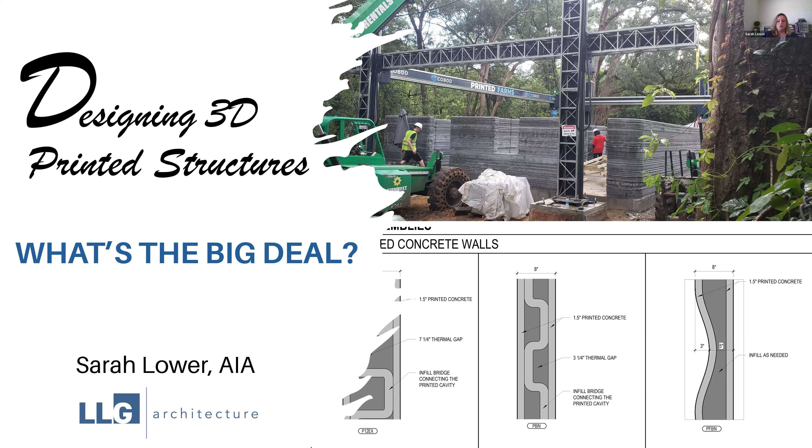So today we're talking about 3D printed structures and what's the big deal. You know, architects aren't responsible for means and methods on the construction, so why should we care? But we do care because we are responsible for the health, safety, and welfare of those that are within the structures that we design. So really quickly, I'm going to talk about our learning objectives, which are brought to you by my daughter.

The participants will be able to identify each type of printer currently available, materials used, and the best application for each printer. Participants will also be able to identify the pros and cons of using 3D printing in construction. You will also be able to identify key design elements that need to be considered from other construction methods. And participants will also be able to apply current IBC requirements and coordinate with engineers to meet current code requirements, for which there is no standard at this time.

So just to kind of outline for you guys what we're going to talk about today, I'm going to do a quick introduction. There is so much to cover, but I'm going to try to do it in 15 minutes or less. We're going to talk about the design process briefly, and then I'm going to go into the case studies of the projects that I have been a part of to date.

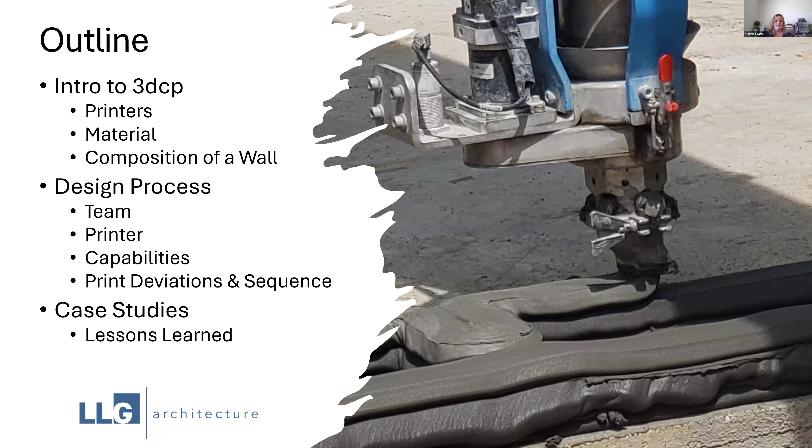So automation in construction has actually been around for the last 50 years, and people don't know it because it's not really taken off. But it has taken off in the last decade, where robots as prefabrication and factory-based robots have really been taking the forefront in the news and what people are trying to do these days.

There are over 300 companies worldwide that are involved in some sort of automation in construction, whether they are actually implementing the machines or manufacturing the machines. Automation is something that people are looking at these days for several different reasons. There's less injury, quicker completion times. The robots don't get fatigue, they don't get sick. There's enhanced productivity and increased consistency because robots are all about precision.

Automation is currently in the United States. They are doing rebar laying and tying, brick laying, marking layouts on slabs. So thank goodness chalk lines are fading out, hopefully. Printing three-dimensional walls, which we're going to be talking about today. And then, of course, there's the security bots that are keeping unwanted visitors off the job site.

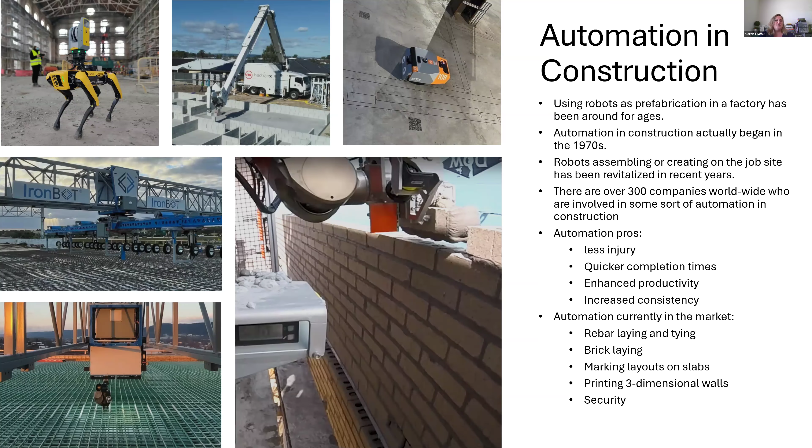So let's talk about 3D printers. There have been over 100 companies worldwide that are focusing specifically on creating 3D printers for construction. Most of them boast that they can print from 2 to 4 floors high, but only a handful have actually created proof of concept. I know Germany, Saudi Arabia, Dubai, and Canada, just off the top of my head, that have 2 or more stories.

You've got 2 basic types of printers, and everybody who's creating a printer is a variation of these 2 things, either a gantry or a robotic arm. Now, the gantry style printer is the printer that you would normally recognize as a desktop printer, something that we've come to see in most offices and what people who buy printers as a hobby use. And so basically they've just taken that concept of the desktop printer and supersized it. And you could see that.

So then the second part is the robotic arm printer, and that's where you have them either on crawlers or tracks, and the pump is feeding the robotic arm, and the robotic arm is then creating the formwork or printing the material, if you will. So the big players in gantry printers these days: Icon, which is in Texas, Black Buffalo, which is up in New York, and then Cobod, which is out of Europe. But they definitely have a presence here in the United States. The robotic arm printers, you have Apis Cor, Cybe, Vertico, 3D Potter, Mudbots. There are lots of the robotic arm ones.

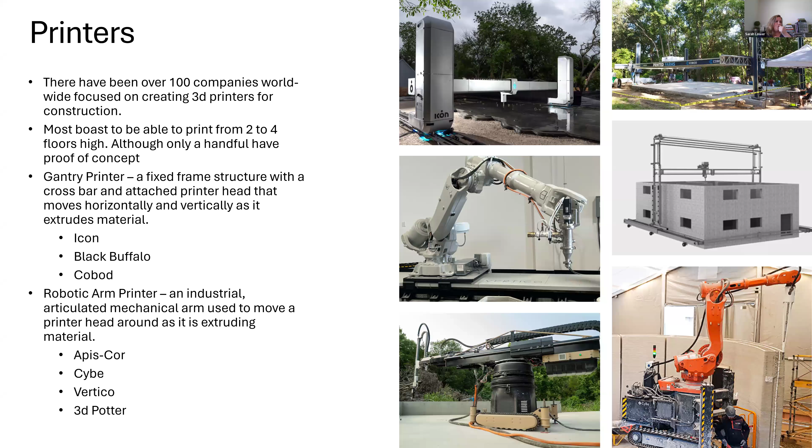Specifically in Florida, the robotic arm printers that we have here, Apis Cor and 3D Potter, are actually being manufactured here in Florida. And there are brokers or general contractors who own a Vertico printer, and then a Cobod printer is also owned and operated here in Florida. And there's also an AMT printer, which is another gantry printer that is owned and operated here in Florida.

So as far as material goes, the bottom line is the material that's being printed for homes is mostly either mortar or concrete. And it's being mixed on site for the most part. You have the super sacks on site, or you can see that they do 50-pound bags of concrete that go into the mixer, that's then brought into the pump and delivered.

And then Apis Cor actually has a unique idea. They actually thought, hey, let's just do a cement truck. So they actually have a component where the mixture is created in the truck all at once. So you have one big consistent mix rather than the possibility of the dry to water ratio not being exactly right every single time. So you have all of these different opportunities and ways to deliver the material to the printer.

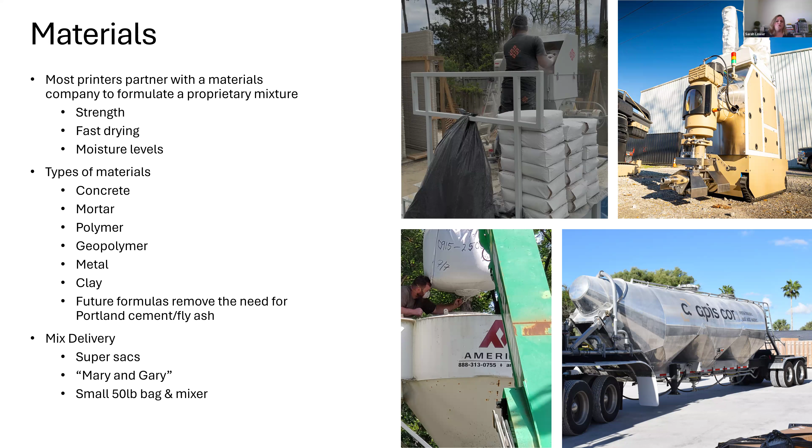So let's talk about walls really quickly. So Apis Cor put this image together.

It is basically a comparison of a wood frame wall to a 3D printed wall. Immediately, the first thing you see is the 14 materials versus 6 materials. And immediately my brain goes to, that's the number of trades that are on the job site. That is less risk, less opportunity for something to happen to one of those trades that the general contractor then has to mitigate or deal with.

The other thing that pops into my mind whenever I see this image is flood damage. So when you have flood damage come through a house, what are the things that you have to replace to mitigate that flood damage? And as you can see on the 3D printed wall, nothing. But on the wood frame wall, there's a whole lot of work that has to happen there. So just something to keep in mind as we look at the pros and cons of 3D printing.

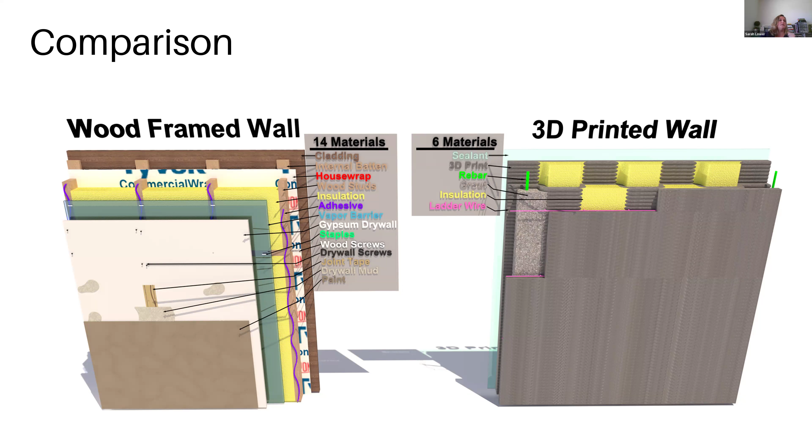And then code. There is no current standard in the ICC that directly talks about 3D printing and what they have to meet. There is a draft that's currently in process, but it is not implemented at all. So over the last 3 years, we have been looking at CMU block or prefab concrete standards that are in the code as to meeting those code requirements in order to get our plans through permitting. And of course, in order to make sure that the structures that we're designing are going to sustain the environment and all the things that they have to go through.

Typically, just a real quick idea of the comparison between the two. CMU block code requirements, the walls have to meet 1500 PSI, and typically the walls that we've seen and the tests that they've done on the walls, 3DCP projects are meeting between 4,000 and 6,000 PSI. So they're not just meeting, but exceeding the code requirement. Which is fantastic in areas like Florida and coastal areas that really need to have that durability in their buildings.

But again, we have this comparison of how these walls are put together, and it's very much like CMU block. You have the vertical rebar, you have the horizontal rebar with the bond beams. You have the joint ladder reinforcement. You have all of the elements that you would need. The connections from the roof trusses to the walls are already on the market. We're not reinventing the wheel here. We're really using things that are already on the market in a different way, or in a way that will produce, in my opinion, a better product.

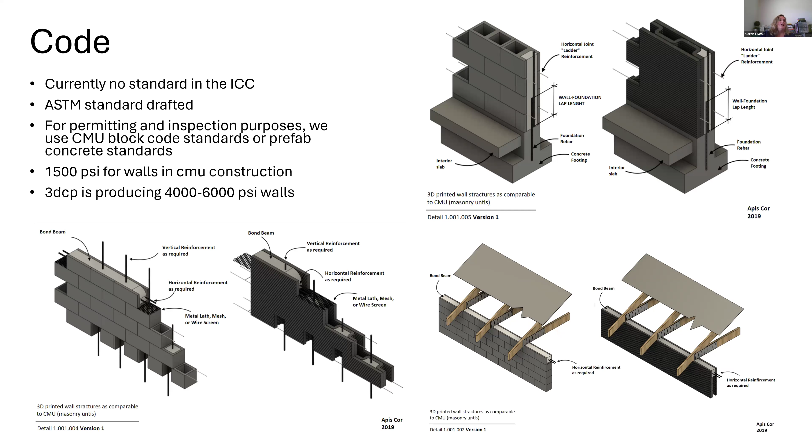Less trades on site, which we talked about with the wall construction. A lower safety risk and health and safety on the job site. The best way to reduce risk is to reduce the amount of people on your job site, right? That's just number one. But number 2, when they're not actually using those tools, when they're not climbing up on ladders to reach a really odd, awkward place, they're not putting themselves at risk. There's less waste, all the offcuts of lumber construction.

There's less carbon footprint. And the way that we look at this is basically the longevity of the buildings that are being built with 3D printed construction. You have a typical house that will last 30, 50 years. Well, these homes are looking to last 50 to 100 years.

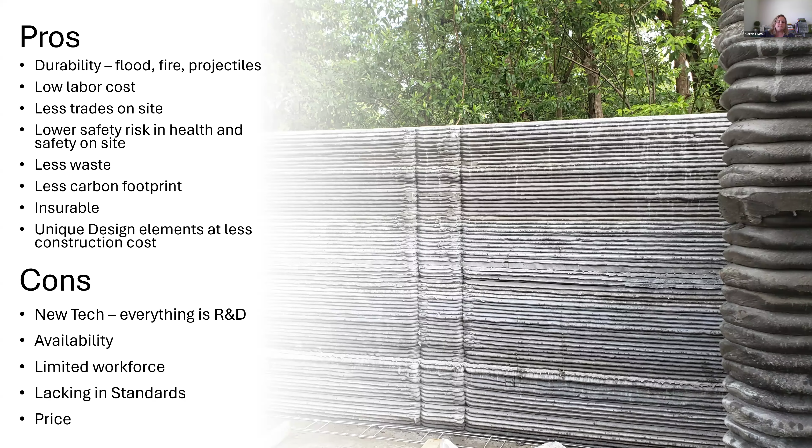So let's talk about the design process that I have uncovered as I've been kind of trial and erroring this for the last 3 years.

So the team is critical, and it's set up more like a CM-at-risk type of team than a traditional design-bid-build. The team you need to have at the very beginning, before you even start your first design, is an owner who's willing to understand that this is R&D, something new, and who needs to be willing to roll with the punches. An architect who is willing to learn as they go. Your structural engineer who is willing to twist and move a little more than engineers typically do. And a GC who wants to think out of the box, is tech savvy, somebody who wants to move forward into the future.

And then the other team member that really needs to be at the beginning is whoever the printer provider is - they need to be an advisor and consultant from the very beginning, because it's critical that you don't go backwards in your design by not understanding everything the printer can and cannot do.

So that brings me to identifying the printer. It's critical to make sure the printer is identified and determined at the very beginning and doesn't change. I'll talk about our first project where we actually had to change printers in the middle, and it caused all kinds of fun, interesting things.

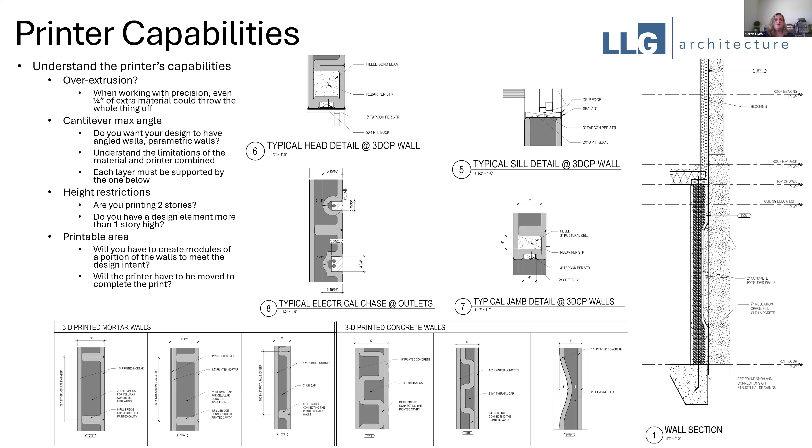The printable area. Just because your site says you have a 50-foot by 100-foot space to print doesn't mean your printer has that printable area. Making sure your design stays within those printable areas is critical—these are all things that can affect the profitability and even the success of the design intent of the project.

Lastly, on this concept, is print sequence. Normally this is something you'd see in shop drawings, and it's kind of a gray area how much the architect is involved in this. However, this greatly affects the design. If it's not decided during schematic design, or at the latest design development, you end up having to go back to schematic design to fix things. I've done that—another lesson learned.

Even though this is identified as the responsibility of the subcontractor, it really needs to be agreed to at the very beginning of the project. So I've come up with a sheet that outlines a view of what walls are actually 3D printed, because we often have a combination of printed walls and framed interior walls. It shows what walls are printed, and if the printer is a robotic arm, what walls are printed in what sequence. That way it's something we've agreed to at the very beginning, and it reminds everybody on the team throughout the process what we're going to do when we get into construction.

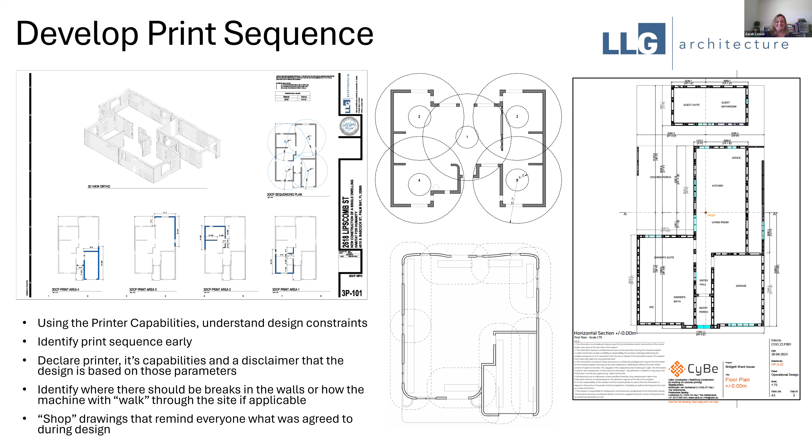So with that, let's talk about case studies. I was the architect on the first 3D printed house in Florida, three years ago. Since then we've had several custom home projects, an industrial office space concept, and worked with Habitat for Humanity—really just trying to get ourselves as much experience as we can to better understand the technology and how we can better serve clients who want to use this design method.

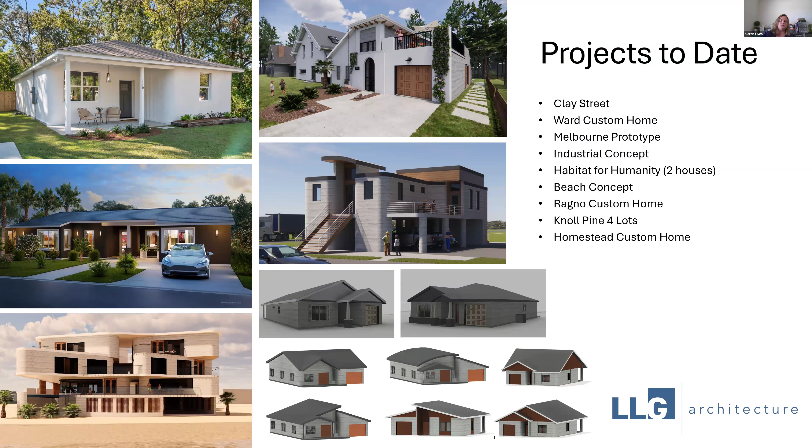The first project we're going to look at is the Clay Street project—this is where I pretty much learned to walk on this. It's located in Tallahassee, Florida. We had an array of people working on it; the general contractor, Precision Building and Renovating, was really the force that got the project off the ground. They worked with the city of Tallahassee to create this as an affordable house, which we felt was awesome—that the first 3D printed house would go not to an investor, but to a family who needed housing. I love that.

We originally designed this project for a robotic arm print, but because of lessons not quite learned yet, that printer fell through, and we ended up using Printed Farms, which is a gantry style printer. Unfortunately, by the time we got to that point, we had already gotten the permit and the slab was already poured.

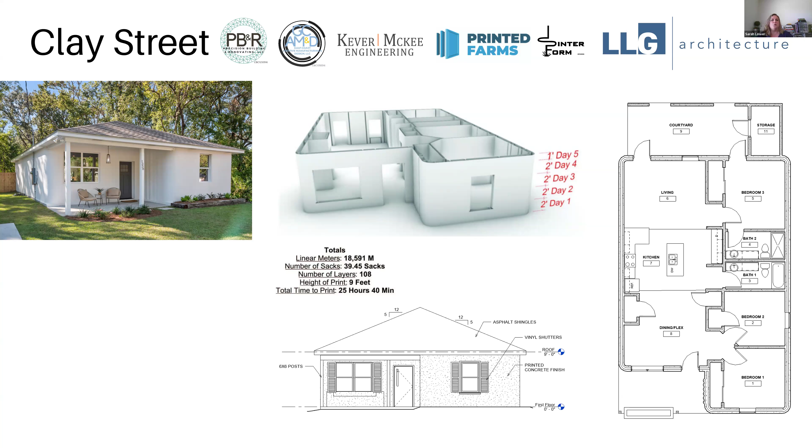So there was kind of a lot of catching up, a lot of calibration, a lot of thoughts of what can we do to fix this problem.

So these images are basically looking at what the operator would see. And I just want to point out that this model of what is going to be printed looks different than the model of what we designed.

For one thing, the storage space in the back was outside the print area, so we couldn't print that. The general contractor ended up building it with CMU block. And then this part of the house was outside the print area as well as this planter, so the planter did not get printed.

And you can see on this diagram, the front part of the house was created as a module, so they angled these in and printed them, and then at the end moved them into place.

The other thing that had to happen was they had to do a bunch of calibration. Of course, the slab is already poured, and this image shows how slabs are imperfect, and there always will be when humans are involved. So they had to do a lot of calibration to make sure that the print was going to be located properly.

The other thing this picture illustrates is those red dots are where rebar needs to go. So they needed to make sure that when the printer printed, there wasn't any drippage or anything that would clog up those holes, because obviously those holes had to be drilled before the walls got printed.

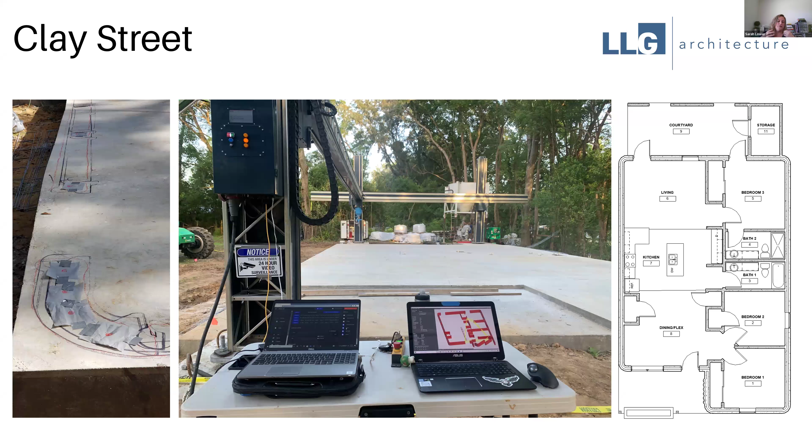So those were some of the things that kind of made the setup take a little bit longer than anticipated, but they got going and everything looks fantastic.

This is a bird's eye view, and you can see just that. This is the slab for the storage out here that is not within the printable area, and then these two portions of the walls that were pulled off of the slab because they were not also able to fit in the printable area. You can also see here, this has kind of grooves in the print, and that allowed for each layer to bond to the next layer.

So essentially, when you're talking about 3D printed walls, they are a monolithic concrete wall. Like the entire house is monolithic because it's all printed at the same time and there's no cold joints. So it really reinforces that idea of durability and resilience in construction.

So the coloration here, you can see this was day 1, and then this is what they were doing on day 2 whenever they were printing day 2.

This image down here also shows how they have the site set up. You can see the super sacks all along back here, with the silo and the pump below it that mixed all of the material. And there was a really delicate balance between the temperature of the water even to the mixture quantity to make sure that the material was accurate from day to day.

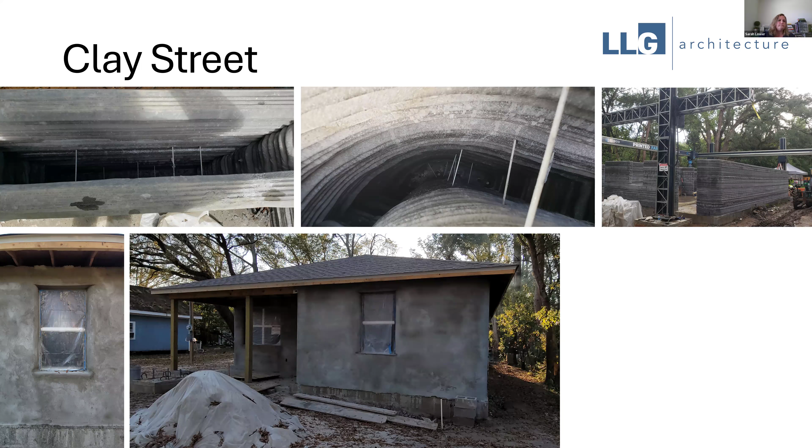I have a couple of videos I want to show, bear with me for a second. The first video is just showing the printer itself. You can see the operator has a handheld device helping him monitor it, so he can monitor it from his machine, his laptop at the home base, or from his hand by walking around the job site. This is also a great image to show how the machine moves in tandem, very similar to a desktop 3D printer.

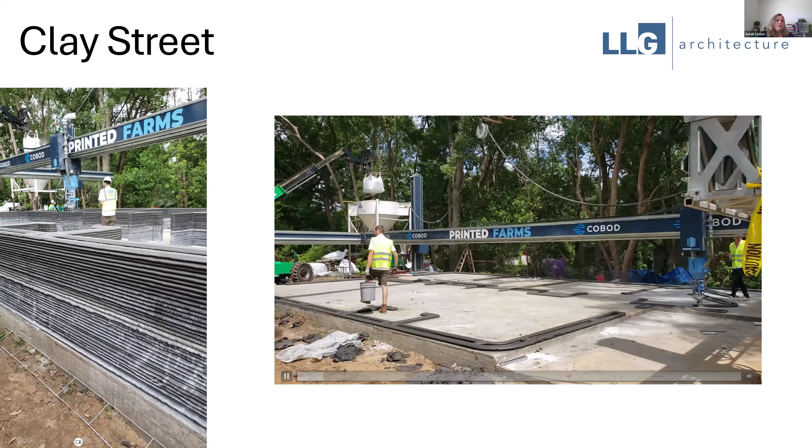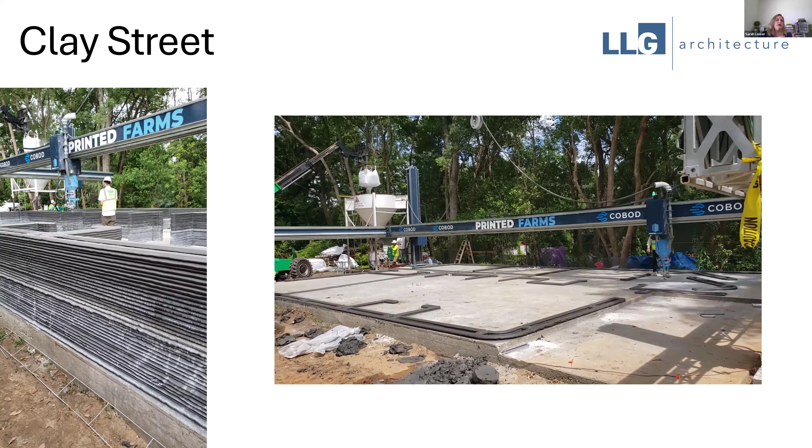The next one is the same kind of idea, you can see the machine moving. But I do want to call out this guy right back here, he's doing hose management. Now Cobod has come up with more new inventions in the last 3 years, so they no longer have a problem with hose management, and there's no longer a requirement to buy or rent a silo and do that whole mixing in a silo. They actually have a pump that comes with their machine now. So even in just the last couple of years, there's been more and more advancing in the technology since this project was completed.

I wanted to show you guys quick pictures of the finished product. This is the type of house that, even though the corners are curved, that's really the only evidence you can see that this house is different than all the other houses in the neighborhood.

I'm a little behind schedule, so I'm going to speed up a bit, I apologize. The next home we did was the Ward Custom Home. This was a really fun challenge because we had an actual client. It wasn't a spec home for affordable housing, it was an actual client who was involved in the process as well.

We also used a different printer, this one printed by CyBe. We actually started off with a different printer, and right before we finished design, that printer was no longer available, so we had to switch to CyBe. I was really thankful we were able to switch before we finished the construction documents and submitted for permit, because then it would have been another fun activity. But in the long run, it was good.

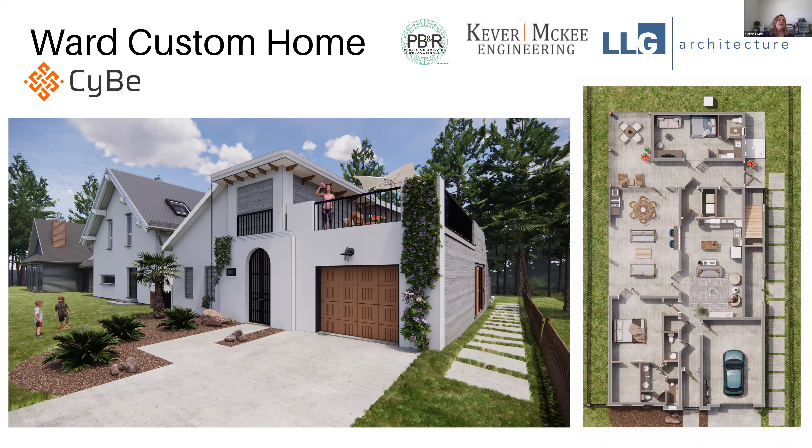These are the renderings we did for this project, just to get a better idea. Here's the project under construction. It's located in Panama City Beach, literally less than half a mile from the beach. So durability and meeting those strenuous wind loads, wind zones, was really critical in this.

The CyBe is a robotic arm printer, and for the mix and pumping mechanism, they basically had an operator do 50-pound bags, constantly mixing to feed the machine.

This is an example of doing a fun pattern in the wall and how little cost it increased. This particular pattern, because it's by the water, we wanted some sort of wave pattern, and it took about 10% more design because of all the iterations, but it was only 1% more material to do this pattern on the project. That's a fantastic comparison to understand how much we can do with little labor cost.

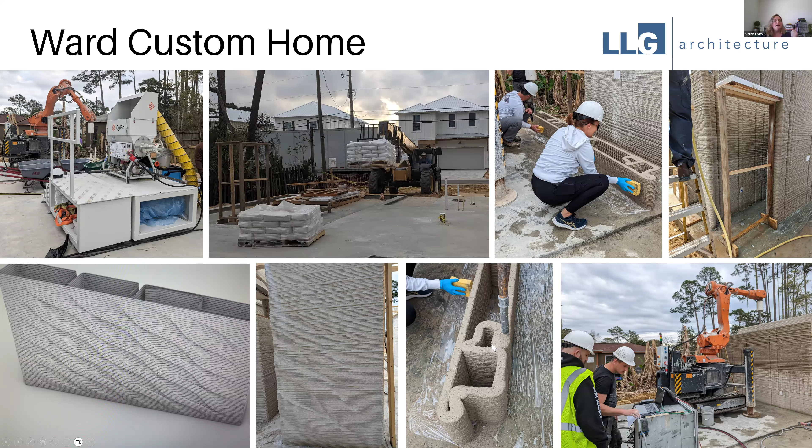The other thing I want to point out is this extra cavity here. This cavity is the structural cavity, filled with rebar and structural concrete. But one of the things we wanted to incorporate was, instead of using Smurf tubing or something like that to run the electrical for lighting and electricity, we actually incorporated cavities in the print. Not only did this make sure we didn't miss any electrical outlets the owner wanted, avoiding an exterior conduit, but we were able to make sure everything was incorporated and reduce the cost of the tubing and additional labor that's required when that's done on site.

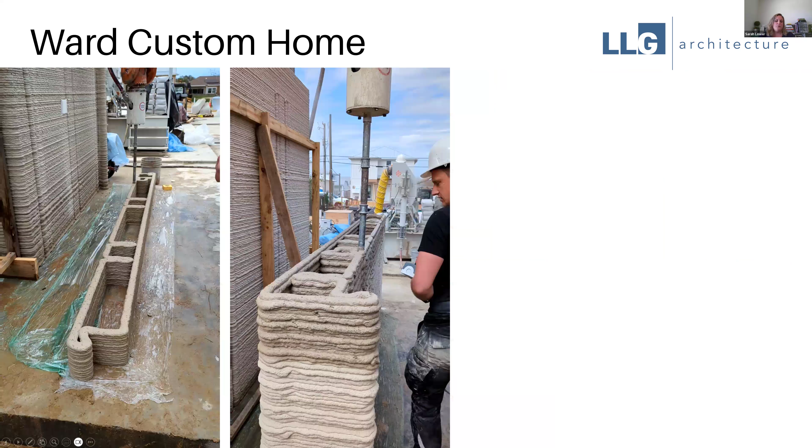I've got a couple of videos on this one as well, just so you can see the difference of how this machine extrudes versus the other machine. This machine had very little to no over extrusion at all. It's just very, very minor.

In this video, you can see the owner is sponging the wall before it sets, because she wanted to see if she could achieve a stucco-like look without having to apply stucco to the front of her house. So again, on the job site, R&D.

Here is just a video showing how the operator is able to monitor the machine, monitoring the output of the material, and making sure that everything is running relatively smooth.

So the last project that I want to do is one that we just recently finished. This is our third project that we were able to permit. This is located in Melbourne, Florida. This is a 2,100 square foot project.

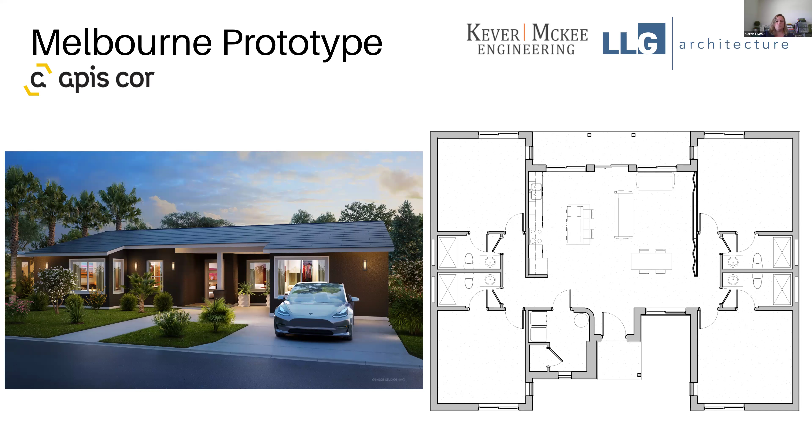Again, we used a different printer. We partnered with a different printer on this one, Apis Cor, which is also a robotic arm printer. And you can see their results.

Now, Cobod, which is also the very first printer that we used, has also incorporated a flap on there, so they're able to achieve a similar result. But you can just kind of see how the technology has improved in the last 3 years.

Fun features in this one: this is the entertainment area where they have a flat screen TV, bookshelves, and a nice built-in fireplace and mantle. And then they also did—I don't have an image of it—a 3D print on the ground and then lifted it up almost like lattice to fill this spot here, going from the great room into the hallway.

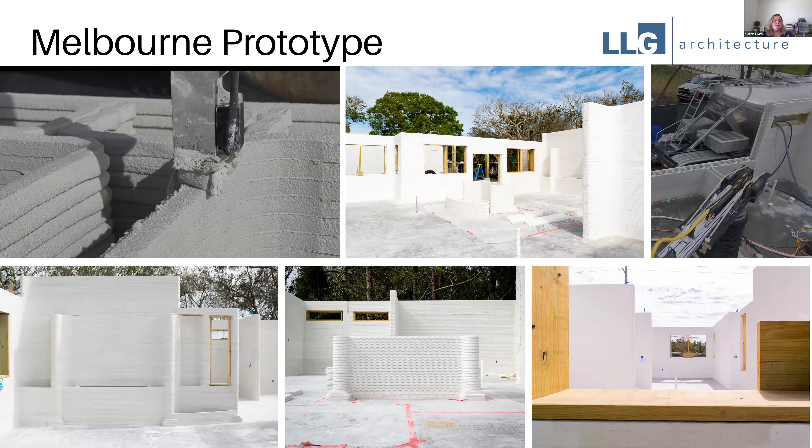So one of the fun facts about this project is they were actually able to print this house for about 30% less than the houses that are for sale in this neighborhood. So again, the technology is improving and they're getting there. It's just taking a minute to do it.

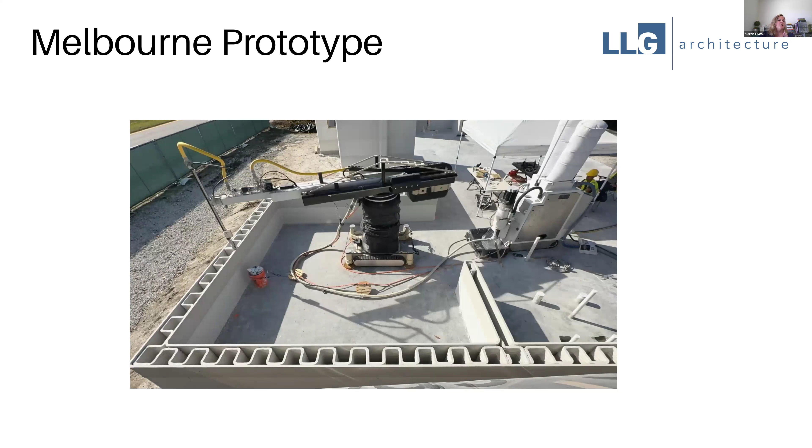So here's a video, a sped up video, showing how the printer is extruding the material, and the pump is pumping the material to the machine. You can also see the printer is on a crawler, so once they finish this sequence, they just move it to the next location, calibrate it, and then get it going again.

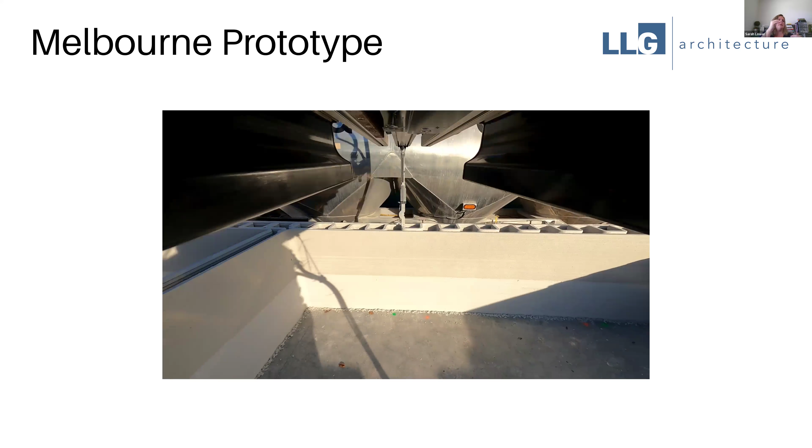And then this is a video from the printer's point of view. You can kind of see how the railing at the top is moving in and out in conjunction with the machine rotating on its axis to be able to print that. And then you can see how they print the interior and then print the exterior.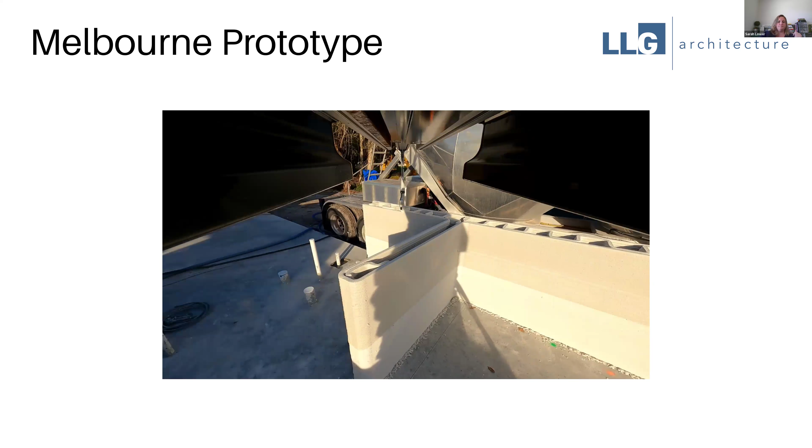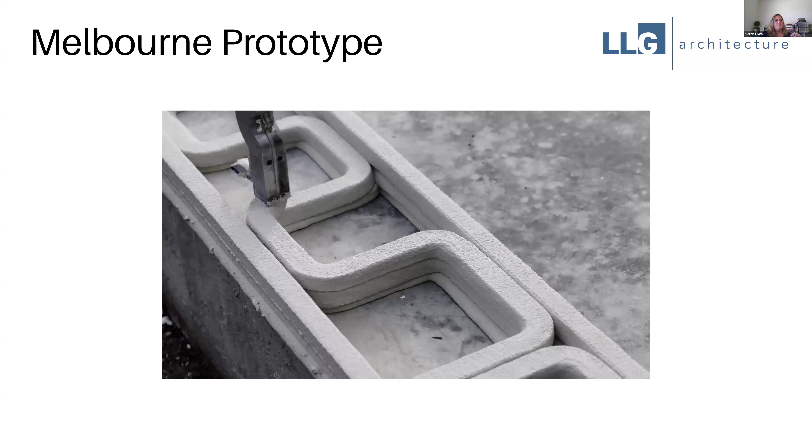And then this is just a print, so you can see actually in real time what the speed of this particular printer is—it is a little bit slower. You can also see how the bar that creates that straight edge is up whenever it's printing the interior of the wall.

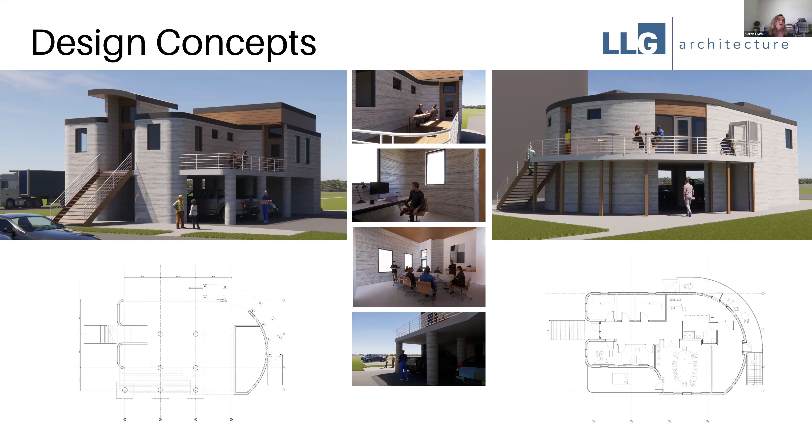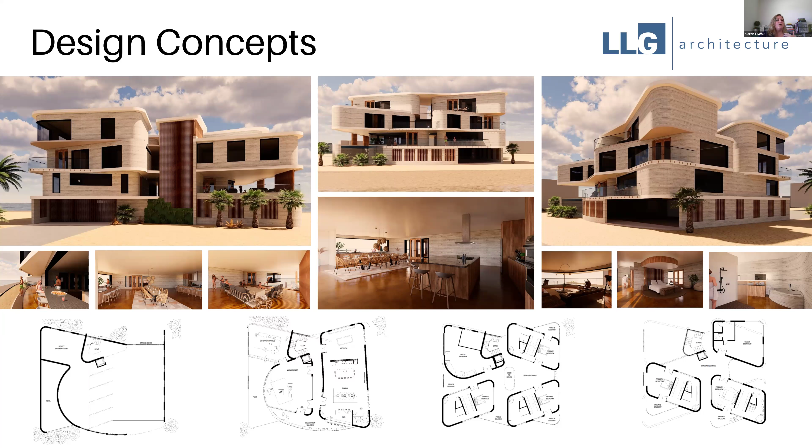And then this is another concept we had for a client that's a beach house. Again, coastal living, we need durability. We need the ability to be able to withstand storms and weather. So this was a concept that we came up with for them of really being able to kind of push the boundaries and what can we do to achieve all of those requirements.

So last but not least, I just can't say enough, form your team early, coordinate with your 3D printer operator early and often, identify your print sequence, and then understand your printer's capabilities in and out, all in the very beginning part of your project.

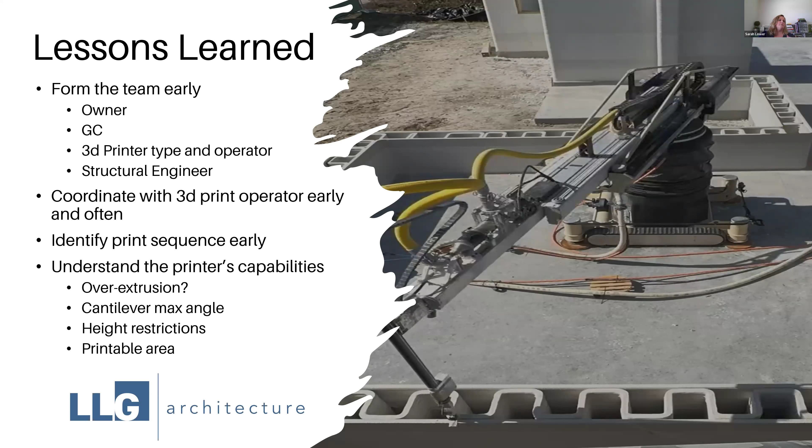So Barbara Hughes wanted to ask about the cost of the machinery and the robots. She imagines it's expensive. So does that offset the lower labor cost, and what is the overall net comparison? And you just had a house that you said was 30% cheaper than the neighborhood. So maybe you can talk a little bit about that.

Sure. So you have printers that cost anywhere between $150,000 to $1 million. It depends on what type. Again, because this is not really regulated, because everything has shaken loose, you have this really big span of what are you trying to accomplish and what are you trying to do.

I know that there's a project that was printed in South Florida. It's a horse barn, and they actually used 2 different printers to print that one. They used the big COBOD printer, and then they used the Vertico robotic arm printer to be able to meet the design requirements of the client. So it really has everything to do with that.

I will say the cost of the printer is just like any investment. You know, does upgrading to Revit cost the client more because you have to charge more because you're using Revit versus using AutoCAD that you've had since '99? You know what I mean? It's just that in a bigger scale.